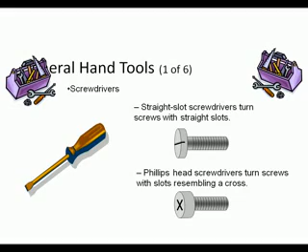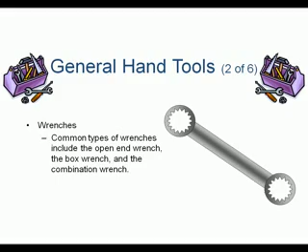General hand tools include screwdrivers, either straight slot or Phillips. You'll also use wrenches, including open-end wrenches, box wrenches, and combination wrenches.

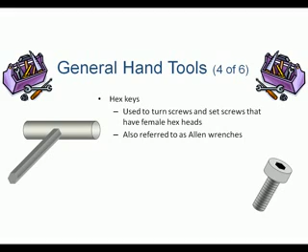Other wrenches you'll have include pipe wrenches, adjustable wrenches, and some specialized refrigeration wrenches. You will also use hex keys to turn screws and set screws that have female hex heads, also referred to as Allen wrenches.

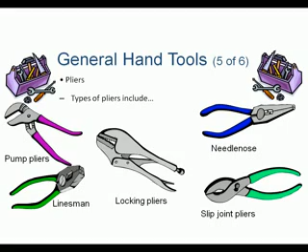You'll use several types of pliers: pump pliers, linesman pliers, locking pliers, needle nose pliers, and slip joint pliers. Each has its own uses. Do not use any pliers with teeth on brass or copper fittings.

For hammers, you'll sometimes use the ball peen hammer, the carpenter's claw, and rubber mallets. Always be careful when using hammers to make sure you don't hit yourself or someone else.

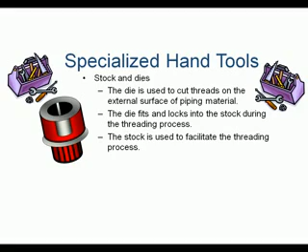You'll use some specialized hand tools like stock and dies. The die is used to cut threads on the external surface of piping material. The die fits and locks into the stock during the threading process, and the stock is used to facilitate the threading process.

There's your die and your stock, and they lock together to create one unit.

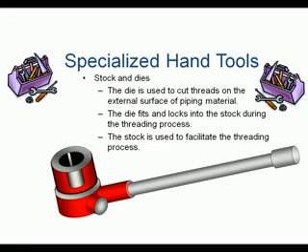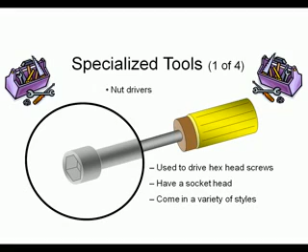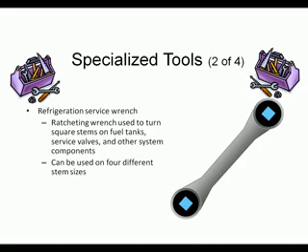Nut drivers are used to drive hex head screws. They sometimes have a socket thread and come in a variety of styles.

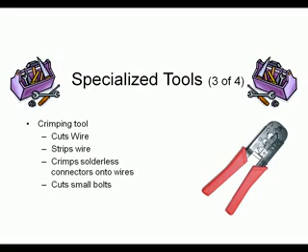A refrigeration service wrench is a ratcheted wrench used to turn square stems on fuel tanks, service valves, and other system components. It can be used on 4 different stem sizes.

Crimping tools allow you to cut wire, strip the wire, and crimp solderless connectors onto the ends. Sometimes they can be used to cut small bolts, but be careful with that.

You'll also need an inspection mirror. It's a telescopic mirror used to inspect solder joints for leaks, since you can't always see all sides of the pipes. These inspection mirrors also allow you to look at heat exchangers and other areas not directly in your line of sight.

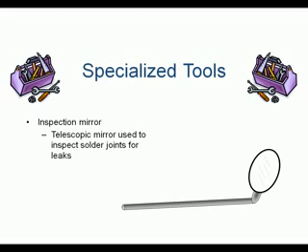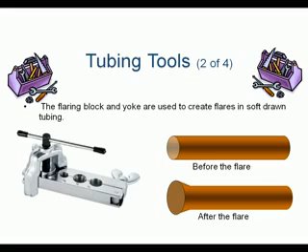Tubing cutters are available in different styles and types, used to cut copper and aluminum tubing and piping material. Larger ones are also available for black iron. The flaring block and yoke are used to create flares in soft drawn tubing.

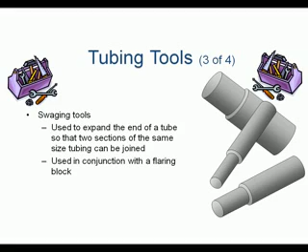Swaging tools are used to expand the end of a tube so two sections of the same size tubing can be joined. It's used in conjunction with a flaring block.

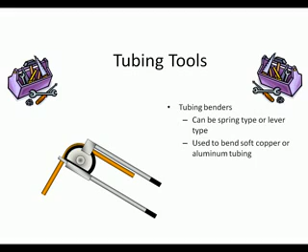You might have tubing benders. They can be spring type or lever type, used to bend soft copper or aluminum tubing.

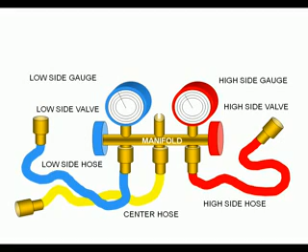You'll have some specialized service tools. One of these is the gauge manifold, your most important piece of equipment. It can read pressures on both the high and low sides of the system, including pressures below atmospheric on the low side, in other words a vacuum, and can be of a 2-valve or 4-valve variety.

It will have a low side valve, a low side hose, and a low side gauge. It will also have a high side gauge, high side valve, and high side hose, plus a center hose. When you open the two outside valves, you're allowing refrigerant to flow between them and the center.

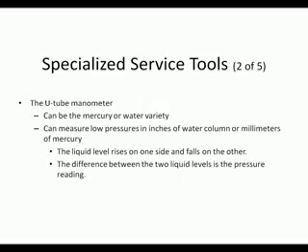You'll also have a U-tube manometer. It can be a mercury or water variety — I would suggest water, since mercury is a hazardous material. It can measure low pressures in inches of water column or millimeters of mercury. The liquid level rises on one side and falls on the other.

The difference between the two liquid levels is the pressure reading. One side is open to the atmosphere, and the other side might go to a gas valve.

When you connect it and turn the valve on, the liquid will go up on one side and down on the other. Add the two numbers together, so 1.75 and 1.75 is 3.5.

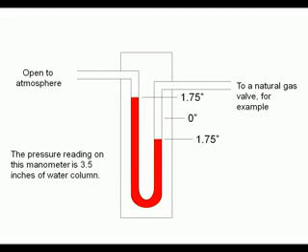Electronic vacuum gauges are now greatly used to measure the vacuum in a refrigeration system during the evacuation process. It can measure vacuum down to 50 microns, or 0.050 millimeters of mercury, since 1,000 microns equals 1 millimeter of mercury.

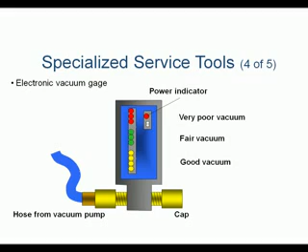As a vacuum is pulled on a system, the micron level will drop. This is an example of the electronic vacuum gauge as a power indicator. As red lights are lit, it's a very poor vacuum. Green lights mean a fair vacuum, and yellow lights mean a good vacuum.

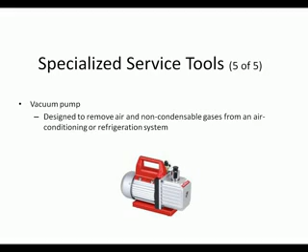A vacuum pump is designed to remove air and non-condensable gases from an air conditioning or refrigeration system. You'll also have some leak detectors.

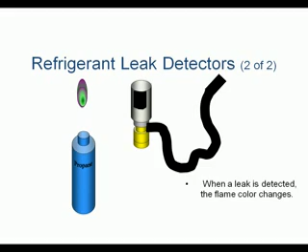A halide leak detector is used with acetylene, propane, or MAP gas. When ignited, the flame hits a copper disc. Combustion air is drawn through a tube, and the open end of the tube is passed over a fitting or pipe. When a leak is detected, the flame will change color from blue to green.

You can also use electronic leak detectors, which contain refrigerant sensitive elements and react to leaks with rapid beeping noises. Ultraviolet leak detectors allow you to add a UV additive to the system, and then the pipes will glow at the point of the leak.

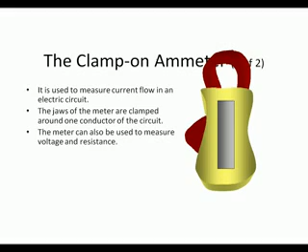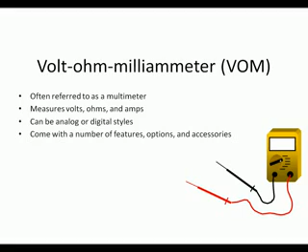You're going to use a clamp-on ammeter — another one of your most important tools. It's used to measure current flow in an electric circuit. The jaws of the meter are clamped around one conductor of the circuit, and the meter can also be used to measure voltage and resistance.

You might have a volt, ohm, and milliamp meter, often referred to as a multimeter. It measures volts, ohms, and amps, and can be analog or digital in style — most often now you'll use digitals. It comes with a number of features, options, and accessories that are add-ons.

So the air conditioning, heating, and refrigeration technician uses a lot of different hand tools. You really should become familiar with them and be able to identify them. Always use the tools and equipment properly, and read the manufacturer's directions — that can save your life.

Only use tools for the jobs in which they're intended. A hammer doesn't make a good screwdriver, and a screwdriver doesn't make a good hammer. Improper tool usage can result in personal injury or equipment damage.